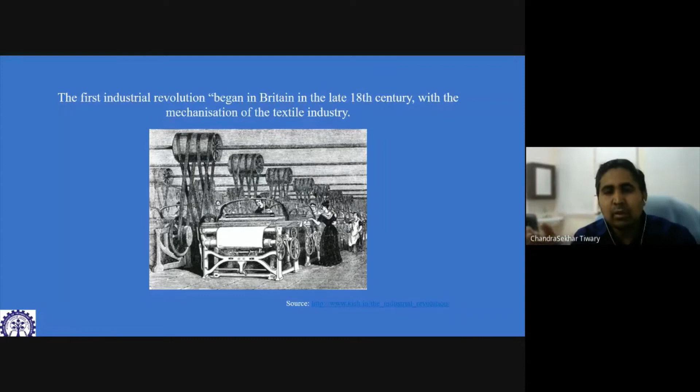The title of the talk is, as already told, 3D printing opportunity and challenges. You know, if you look at the industrial revolution, what I feel is in human history there are certain milestones which have changed the history of society or mankind. And one of them, certainly the closest one, is the industrial revolution, right? And whatever we see today has a lot to do with this first industrial revolution, which started in Britain.

If you go back to your history books and read about it, there were several countries leading in their own areas, and they were on top of production or productivity or yield or whatever economic measure you say. But what happened in this first industrial revolution, which started in Britain, is they started bringing machines into production.

And as a result, if you see the textile industry, which was one of the major industries at that time, where India or any other countries were making cloth or textile goods with a lot of manpower, a lot of cost, and also it doesn't have a lot of freedom to do things. Whereas the industrial revolution can start making things much faster because of machines.

At the same time, the reproducibility, like doing the same thing or the same size of those things, or standardization, was much better. Man plus machine plus resources were well optimized. And after that, if you see, the countries who really took over this industrial revolution are leading till today.

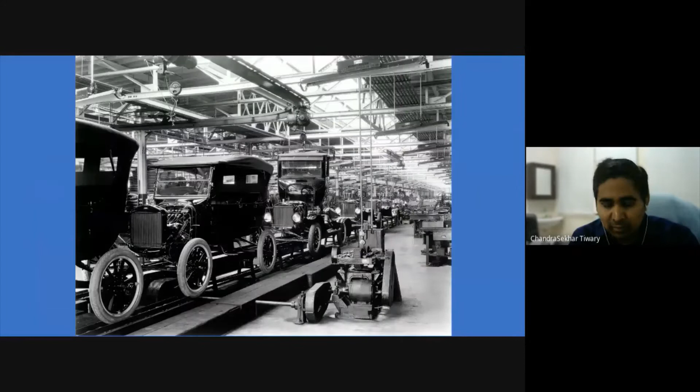And that's what I mean by customization: the old cars used to be like that, and if you see today's cars, it's kind of everywhere. And that's the second revolution in industry, we can say. After that, every good today has several categories, or categorization, that you want X size, Y size, X color, Y color, and so on. Giving options became quite common in any good or product.

Now, the third revolution, which is in process, is manufacturing. And again, we are coming back to the first industrial revolution, where machines were introduced. Now what we are talking about is, can we start making things without even humans? Can we do things automatically? Now, in manufacturing in general, most of you know there are two methods. One is additive and the other is subtractive.

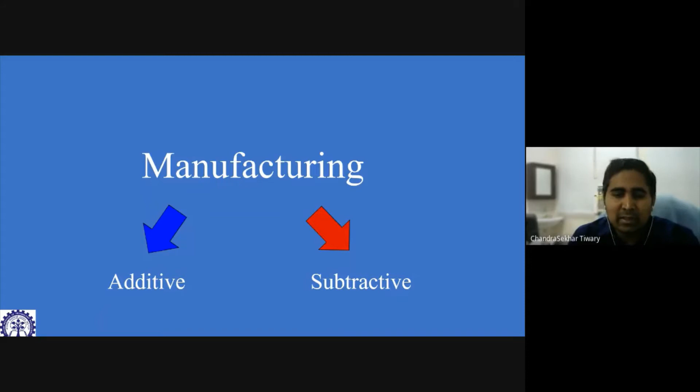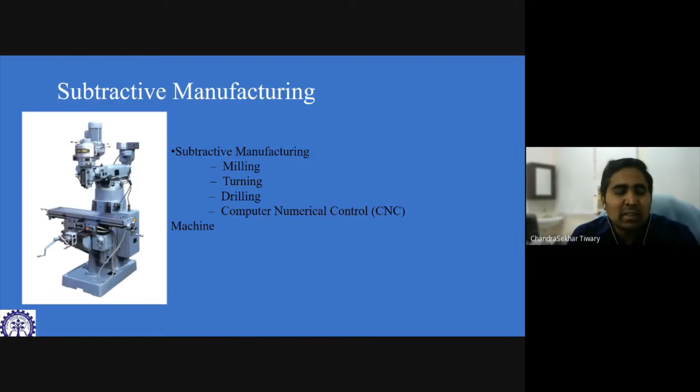Subtractive is very conventional, and every college or industry will have some bits of subtractive manufacturing, where drilling, milling, turning are there. You cut the block into the required size, shape or dimension, throw the rest of the material, and give the shape you need. But the problem is, when you cut, you lose a lot of material first. Second, it's really time consuming. But because there was no other opportunity till now, people continued doing it.

But now additive manufacturing came, and the word additive means you add things rather than removing things, and it brings a lot of exciting things, a lot of opportunities and a lot of challenges. We'll talk first about opportunities, and then come back to challenges and limitations in this whole area. With additive manufacturing, you can make 3D objects by manufacturing layer by layer.

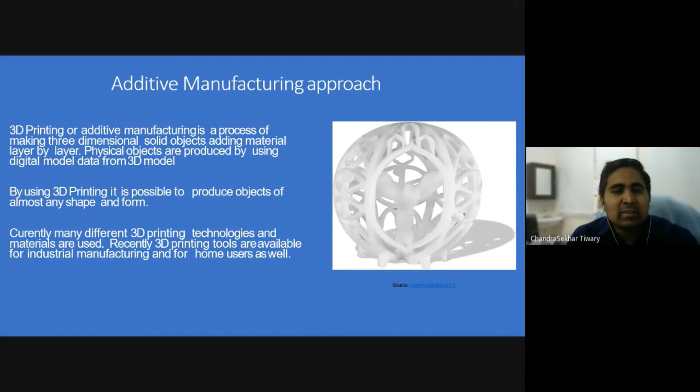Depending on what kind of tool you choose, you can make things at different speeds, different resolutions and different materials. On the right, you can see some very complex shapes. With conventional methods it can take very long, or you cannot do it for every material. But with 3D printing, we can do all these things in much less time and very efficiently.

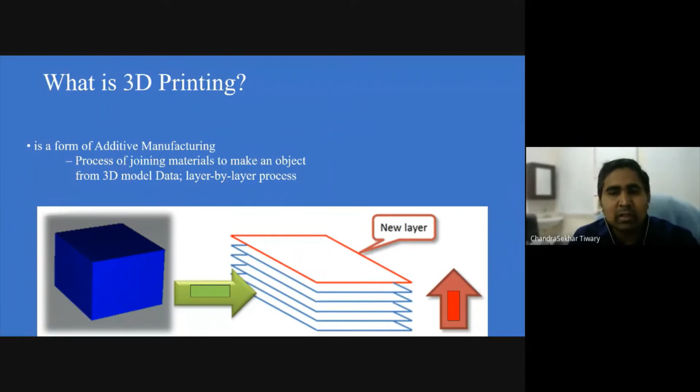Now, I think this slide is not needed, because everyone has talked about layer by layer, so we are not going to talk about it. Now, if you look at manufacturing decisions, the three important things which decide the whole manufacturing are speed, price, and quality.

Now, if you really want to have a perfect combination, you need to move in between somewhere, where you have a lower price, higher speed, and acceptable quality. Now, if you look at 3D printing, the good thing is it gives you freedom to tune all of it up to a huge extent. And definitely speed is one way where you can do much faster.

Quality wise, yes, you can tune the quality, or you can reproduce it and make the same thing again and again. And price is something which needs to be optimized depending on what process you are choosing, or what material you choose, or what you require, and so on. But definitely 3D printing gives you flexibility to check or choose any one of these.

Let's quickly go to advantage and application of 3D printing, so I'm sure the previous speaker has talked about it. But what I have tried to do is categorize different areas, so that we know what are the avenues, or what are the future directions of 3D printing people are looking at.

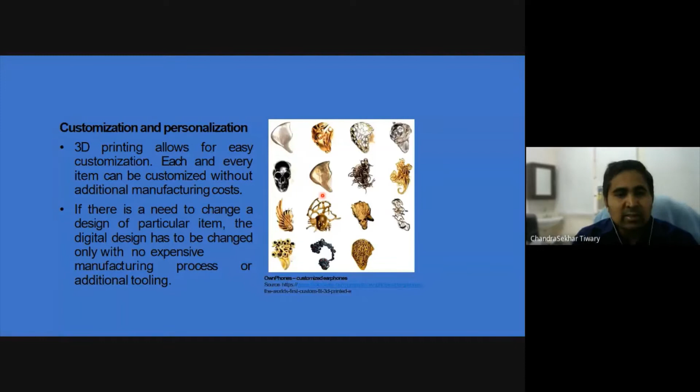Apart from that, that brings us to the next step, where we can personalize or customize manufacturing. When I say manufacturing, suppose you want to make jewelry. Everyone wants their unique jewelry, or you want to make something for education purposes, or even for medical purposes, and so on. So what I mean is, if someone wants X in 3D printing, that can be customized with much less expense, more flexibility, and with reasonable speed.

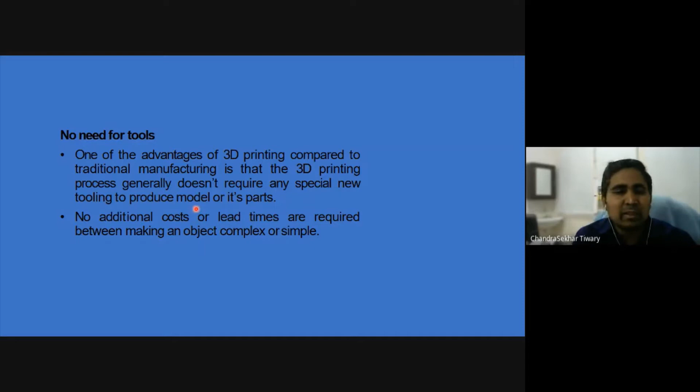Now, as we discussed, when you go to the subtractive method of manufacturing, one of the biggest challenges is the tool, right? So suppose someone wants to craft things on metal, the tool gets eroded or breaks very easily. Whereas when you're using 3D printing, there is no concept of tool as such. So then the whole planning and designing, which was in production, goes into designing a tool, is no more required. What you need is just choose the method of printing, and you can make anything and everything with all flexibility and ease.

Now, people keep talking about 3D printing in terms of market. So for example, you come up with a product and want to put it in the market. One of the bigger time sinks goes into scaling up. When I say scaling up, suppose you make a prototype which is, say, inch by inch, and you really want to make the real product which is 1 foot by 1 foot, maybe 12 times, and you want to scale it up. Now, in the normal method, it's not very simple because it involves several optimizations. It can have a lot of defects and a lot of challenges involved, and all this takes a hell lot of time.

And that's where the longest time into the development of any technology or product really goes in. They have to spend time on that. Whereas in 3D printing, the nice thing is, if you choose the printer and the scale of printer, suppose you take a real laser-based printer, you print something of an inch, or you make it a foot, the scaling effect is not much because you are using the same technology. It doesn't involve too many tools or too many parameters which need to be optimized. So that reduces the development time drastically.

That's one reason why, if you look at the number of startups or companies growing faster in this business, quite a lot of them are in 3D printing. The moment you produce a new class of 3D printer, everyone starts using it. So the flexibility to consumers, combined with the flexibility to scale up, really makes it one of the key developments in the last 10 years.

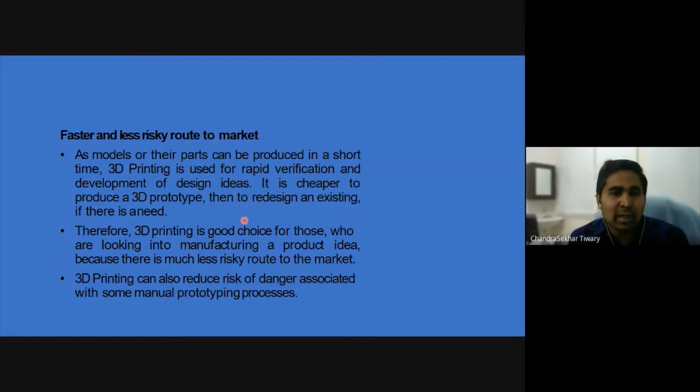As we discussed, 3D printing has less waste, is sustainable, and environmentally friendly. In conventional manufacturing, the subtractive method, you create dust. If you go to places where people work with clay or ceramics, cutting generates huge amounts of dust. Whereas in 3D printing, you just print without generating waste or dust, which makes it much cleaner and environmentally friendly, as well as sustainable.

We don't generally think about sustainability, but consider a material like gold or metal, which is a limited resource. Suppose you have 1 kilogram of gold and want to make things. If you use a method where you cut and rework, there's loss involved, so you start losing material. Now, with a 3D printing method where you don't lose even a gram, that makes it more sustainable. Because losses are low, it helps retain and utilize material in a better way.

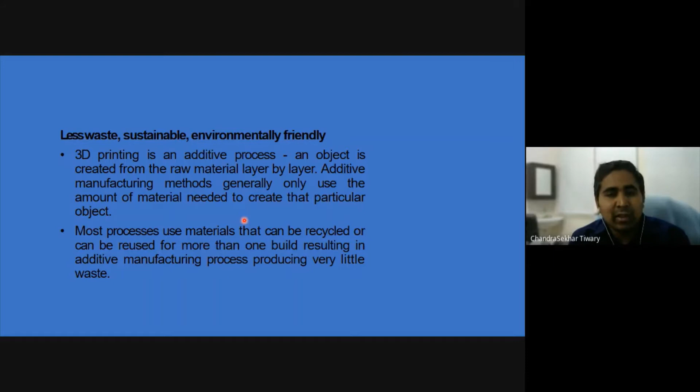Now, limitations - yes, there are a few. One is higher cost initially. Depending on what method or scale you're talking about, and depending on resources, it can get costlier. But if you do it for a long time, that can be optimized. People need to think about this, and they are working on it currently, because this area has only really started in the last decade.

We don't have too many material choices yet. Someone can ask, can we print diamond? Or can we print carbon-based material? Those options just aren't there yet. Not every material can be printed, and you cannot get every color, because people are still working on it. We don't have all those options at this moment.

There's also strength and endurance. In one of the initial talks I heard, people try to see how we can match the strength of conventionally made materials. With optimization, we can achieve it, but that still needs to be done for any 3D printing method or material.

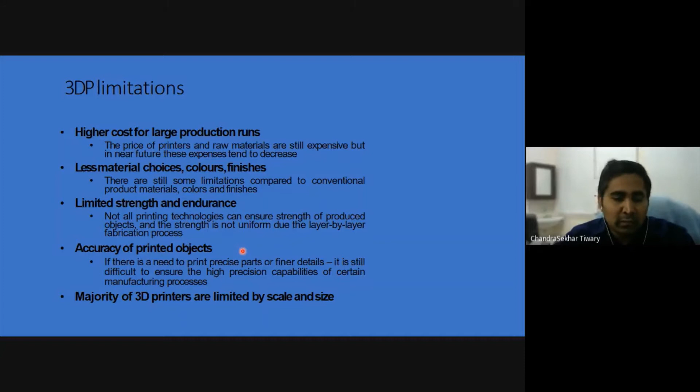Accuracy of the printed object depends on which printing method you choose. Surface finish and dimensional tolerance are still issues - if you need precise dimensions, the shrinking or expansion during the process is something people still need to work on, as is surface finish.

Looking at the market, not too many industries are putting 3D printing into practice yet, though many see it as a future perspective. They're looking at how to start doing things, but it's not yet in the market at a scale where large quantities of goods are produced using 3D printers. Small things have been done, but it's not universal yet. We don't have too many large-scale printers - most printers are of limited size. That's something people are working on.

I'll give just a quick brief history. Other speakers before me have talked about the history of printing, but I want to spend 2 or 3 slides on it to give you perspective on why this whole 3D printing boom came about. People might say, if you understand the basic science, 3D printing was around for a very long time - it didn't just come out of nowhere. What changed over time is what we're going to discuss, to explain why this 3D printing boom happened.

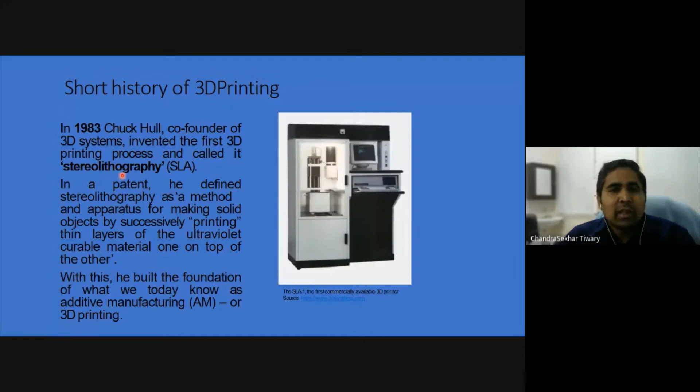If you look at the history, in 1983 a group of physicists or scientists were developing stereolithography, which is essentially a method of making a material.

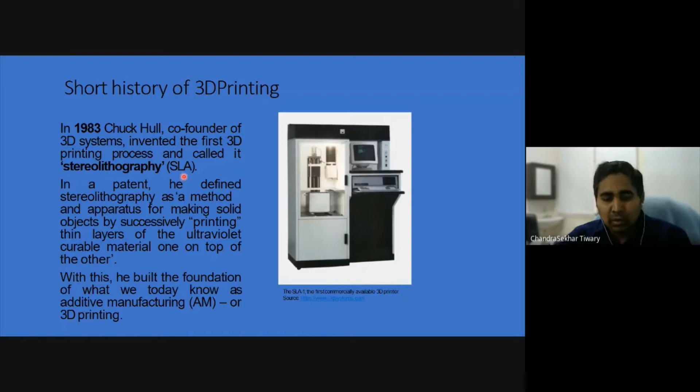You make the first layer and then let it cure, then put the second layer, let it cure, and keep on doing it. They call it stereolithography, and they put the short name SLA. The patent was granted and so on.

But nothing happened, or no major development happened in almost 20 years, or I'll say 2 decades. Nothing was happening. People were doing it in research. But the real boom started in 2000, or 2003 onwards, where this started becoming one of the buzzwords.

Now you can see an interesting observation, right? A lot of science which has been developed before never came into real notice, just because resources were not there. When I say resources, the first thing I refer to is computers. Computer, electronics, or computer-human interface was not well developed till 2004. So although in 1986 they developed everything and the science was known, it took almost 2 decades for people to really develop the computer thing.

And once we started getting computers, or the interface of computer and machine, they reached a level where they can really make it easy. And just because of our computer capacity today, or the software to control motors, or the real machines, we are able to make these printers at home or anywhere you want. You can even do it with your laptop or mobile phone nowadays. So one of the printers we have, you can print using mobile phones. So the point is, with computer development, people started realizing the power of 3D printing, and then this whole history follows, which people talk about all over.

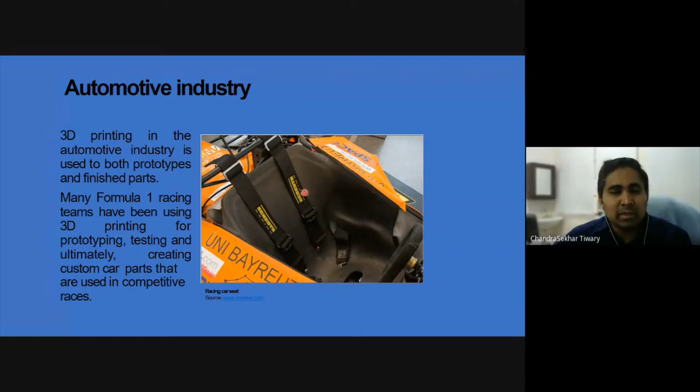Now, as I told you, application area: automotive industry. Yes, India is one of the good leads in car making or car consuming. Also, we have a huge market. But remember, still in cars you need a lot of customization. Suppose you want to make things specific, or you want to make a high-speed car for very specific dimensions and so on. So automotive industry is one of the driving forces in the 3D printing area, and people are working really with very high speed in this direction.

Just for example, if you go on the news you find people have developed, or they claim they have developed, and it's all over in the news, 3D printed tires. Now the question is, why are 3D printed tires needed?

The first thing is, suppose if you have a road, and it's very common in India that we get a tire puncture. Now, if you are moving at very high speed, what's going to happen is you end up having a huge number of accidents. And yes, we do have a lot of accidents because of such cases. And in the West, it's a bigger concern, because if your car is moving at very high speed, a small puncture can lead to a big disaster.

So there is a lot of work going on in this direction, where people are trying to build it up so that we don't face those things. At the same time, if you have 3D printed tires, you can also take care of the roughness of the surface. When I say roughness, I mean small ups and downs can be taken care of, because these structures are built in a way that can handle small shocks.

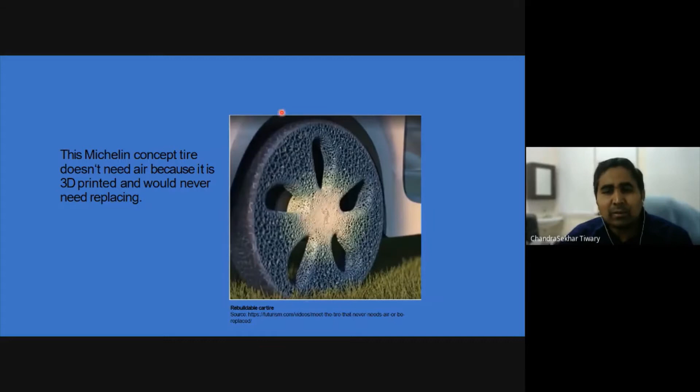So that helps in taking care of the body of the car and so on. But that is one of the directions people are working in. There are a lot of things that need to be done before you really see it. But yes, there are initial successes as well.

The medical industry is one of the really driving forces in this area. And I think tomorrow you have a talk by Professor Vikramjit. I'm sure he's going to talk about this kind of advancement. But yes, in the medical industry, one thing is we have to clearly understand every human is different. Although we have medicine which is generic, if you want to have implants, or an operation, or an organ, each of us has our own characteristics in our body, right?

So if you look at your bone, or any dimensions, they are very specific. Now, if you really want to repair things, a universal part, although people try to use it, is not very sustainable or not very comfortable. If you really want to get rid of this problem, the only solution can be 3D printing, where you can scan the body parts. Let me give an example.

If you undergo an accident and your bone breaks, what they do is put in metal parts, right? Remember, these metal parts are not custom made, they are very generic. So after some time they need to remove it, because it's going to create a problem for you. With current technology, people are trying to make implants which are very sustainable to your body and match your dimensions, so they fit perfectly, which will help you in terms of healing and the sustainability of your body as well.

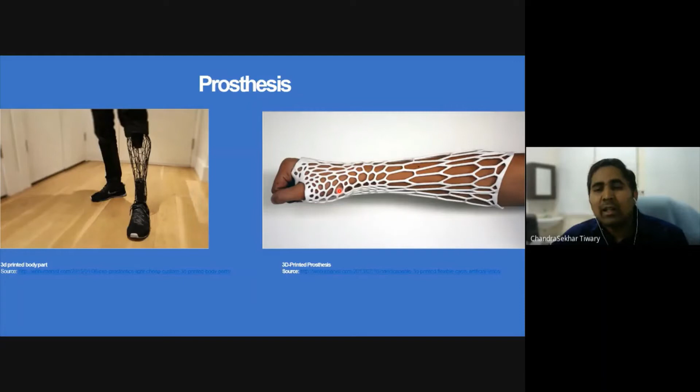Prosthetics is another area where, again, each of our body dimensions or features are different. So with 3D printing, we can build things like a leg, where you can choose the part that got infected and make it. If you have a small ankle or a small twist, you can take your shape and print things of your dimension. At the same time, you can create porosity, meaning lighter weight, easy to wear, and so on. In one of the research areas, we'll talk about that as well.

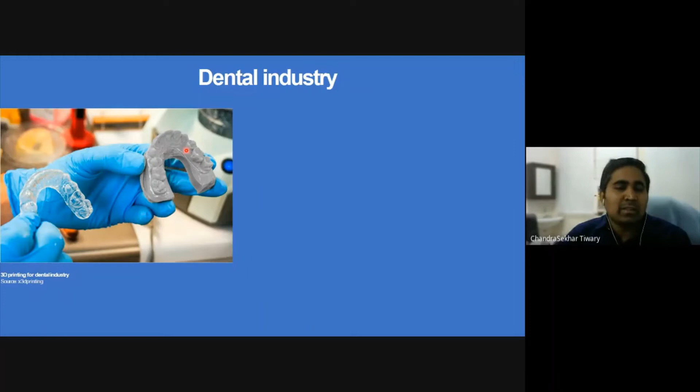Dental is again part of medical. People have been doing this, but if you go to a dentist, they take the shape and it takes longer. With 3D printing, you can do it faster, and that can help this industry.

Aircraft aviation is one of the industries where reducing weight or increasing specific mechanical strength or specific modulus is a key issue. With 3D printing, people are sure we can improve fuel efficiency in a drastic way. But remember, this is an industry where the risk factor is very high, and that's one of the things that concerns them. But still, people are trying to go in this direction.

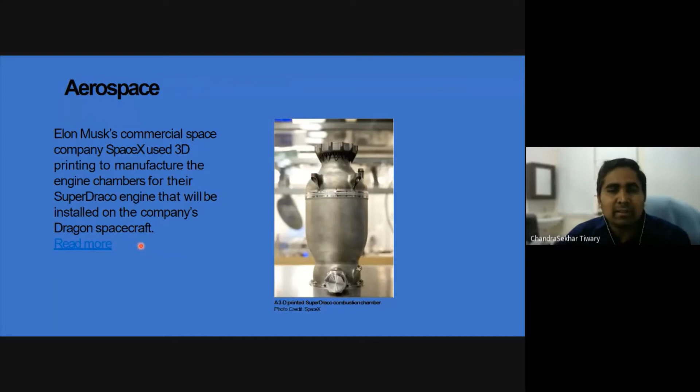There's a lot of work happening because all these aircraft have very complex shapes. I'm sure you were taught that making complex shapes like this in aircraft takes a very long time. With 3D printing, people expect to reduce that, and you can also tune it very easily. But again, this is an area where people are doing a lot of research.

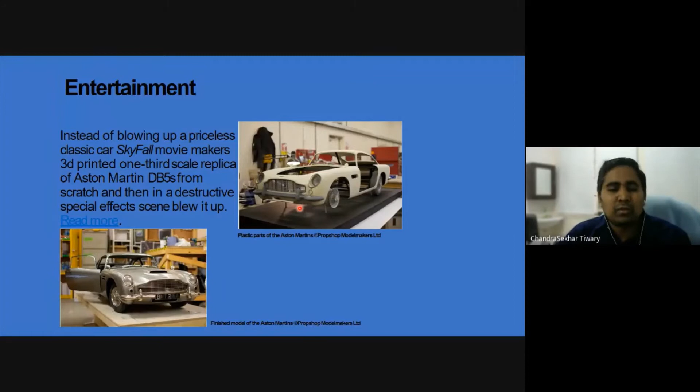Entertainment, yes, especially with movies getting expensive, people want to see more realistic-looking things. People want their own way of imagination, and entertainment is the place where you create things which may not exist. 3D printing is used drastically all over the world for this business.

Art and design: you want to see beautiful things with complex shapes. 3D printing gives you whatever you want, and that's one of the areas where it has taken a huge lead already. You may or may not know there are several things which come to you already 3D printed. So this is one area which has gone way ahead, and they are doing very well in this direction.

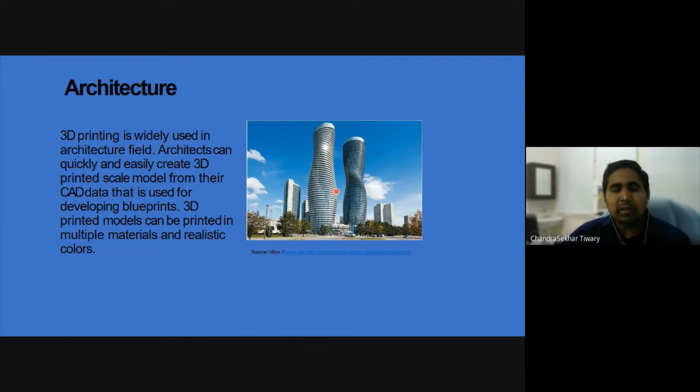First, it's easy to make. At the same time, you can decide how much complexity you want, or you can customize. But this is the area where I think it's showing, depending on infrastructure or utility or requirement. But again, this is somewhere people are moving very fast.

Jewelry, yes, as I told you in one of the initial slides, if you want customized or specific jewelry, with 3D printing they are able to do it. There are several companies or several groups who are trying to do this kind of customization of jewelry.

Education is another area where 3D printing is contributing in a huge way. If you remember your school days, if you have taken biology in your 10+2 or even in your bachelor's, you end up cutting a frog or cutting a species. And some of us may not like it. If you can tolerate that brutality, yeah, maybe you can say brutality, you're okay. Otherwise, some of us can faint and so on.

But the nice thing about 3D printing, you can print any object, whatever the complexity. You don't have to kill anyone. You don't have to cut a frog and then stitch and throw and so on. You can easily learn all those things, especially for human anatomy. In medical science, this is very useful, where they 3D print the parts, and then you can teach batch by batch, and you can use it for several years, and still you can learn things.

So 3D printing, not just in medical, also in any other science area, it's coming up very easily. It's already there in the market. You will find a number of examples of this.

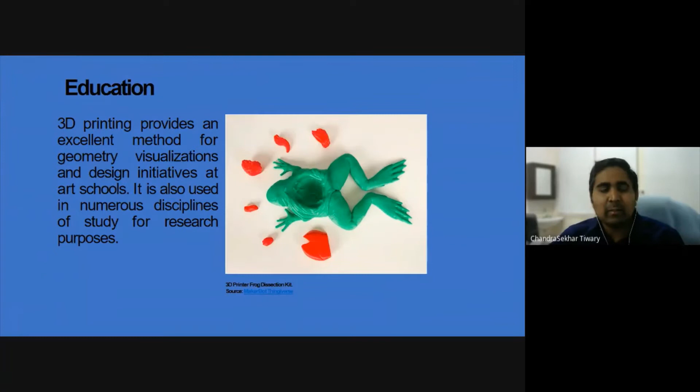You can see my laser pointer, right? Hello? Yes, sir. Okay, perfect.

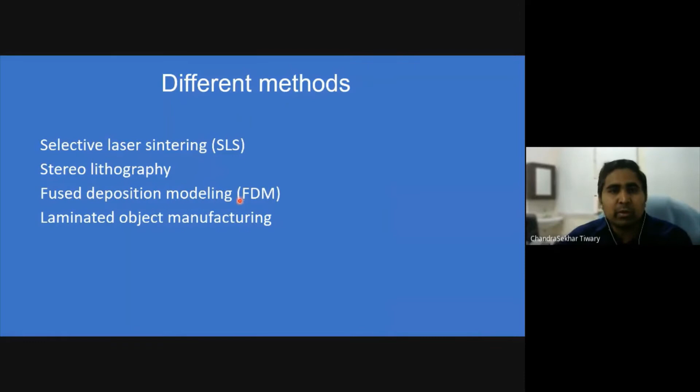Now, different methods of 3D printing were already discussed, and I think people have talked about all the methods. Depending on who has categorized it, it changes. Depending on material or society, there are several of these 3D printing tools and technologies. Every method comes with some advantages and some disadvantages, and you have to balance that while doing any 3D printing. But in terms of research, we'll try to see where a researcher can get in and what things we can do.

For example, if you have an FDM-based printer, which is very simple, it doesn't use any toxic material. It can be kept anywhere. It doesn't need any post-processing because it has a lot of nice surfaces and so on. It's cheap, it's light, hence it can be easily carried or moved. But it has limitations, like the accuracy completely depends on the filament. And you cannot make the filament of any material, so that's another limitation.

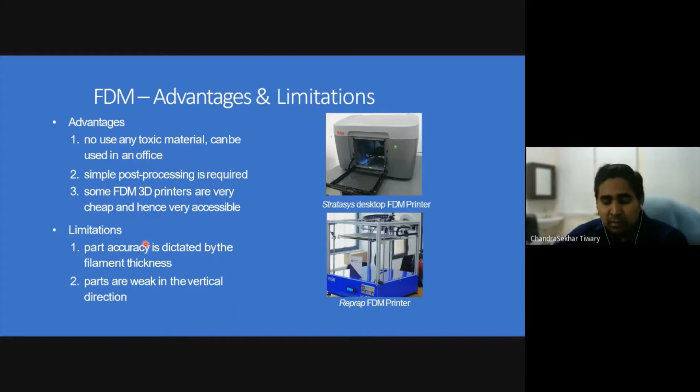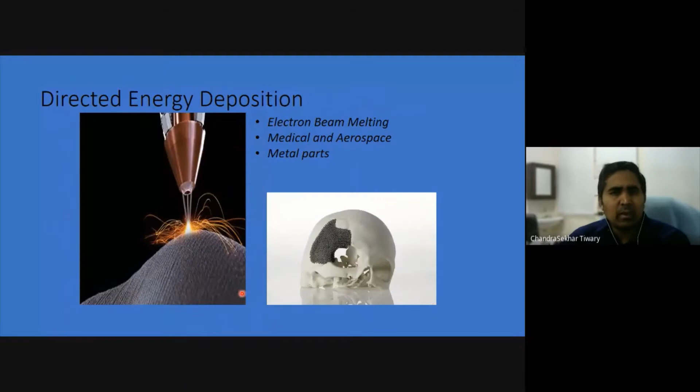And in general, remember, these are made with a low temperature polymer, hence they are not very sustainable at high temperature. Also, with the strength, you cannot make really big structural material and so on. So we can go on; each of these tools has advantages and disadvantages. Depending on which tool you choose, you have to live with it. I think all these were discussed already, and we will not spend time on it.

In one of the last sessions someone asked a question about it, and I thought it's good to put this slide. In metal, and especially in manufacturing, the laser-based printer is all over; every manufacturing company is buying it and trying to see how they can replace components. But there are a few challenges which are crucial in metal-based printers. First is porosity. Whatever printing method you use, people are still trying to see how we can achieve 100% densification.

Now, remember, if you make the component for space or for atomic energy or things like that, you are supposed to make a solid object. Now, if you have a very small porosity, and material scientists or mechanical engineers will agree with me, even a 0.1% porosity is good enough to have a catastrophic failure. When I say catastrophic, it means suppose you have a void, which is going to act as a site for a crack; it's going to expand all over.

And as a result, you cannot really put things in space, or even in nuclear energy, or for that matter, for very specific medical cases as well. So you don't want those things. So achieving that is still a challenge, and people are working at it.

And isotropy is another thing which is very crucial in most of these 3D printing parts, because if you change the direction of the object, you see a difference in mechanical property. Yes, and if you look at horizontal versus vertical, the porosity changes, which is not very easy to control. People are trying to see how we can do it, and at the same time you see a huge difference in directionality in terms of grain size and so on. So that is still an area where people are working, and a lot of metal-based 3D printing is still concentrated in that area.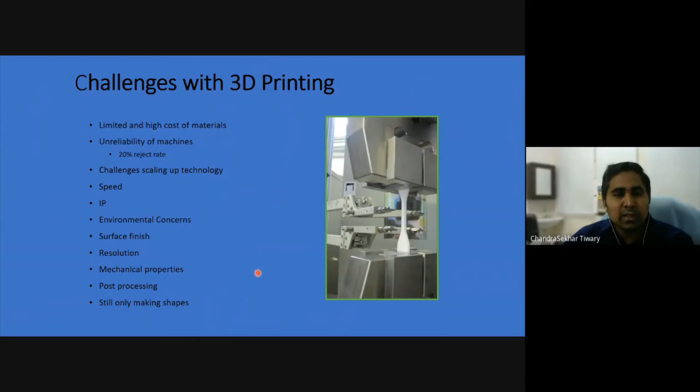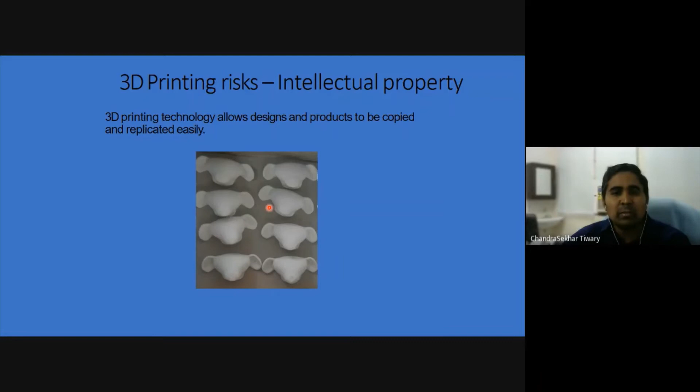Yes, it has. We discussed some of those challenges, so I think we don't need to discuss them anymore. One of the risks which comes with 3D printing is intellectual property. What it means is, if you remember, you want to make parts of any object, and the patent used to be held by X company because they have the technology to make it. But with 3D printing, anyone and everyone can make things. So a lot of companies who hold intellectual property are worried about how to keep track of it or keep hold on it, because any parts can be made by 3D printing.

Yes, cyber risk is there, and a lot of discussions are in this direction. But again, that's something which comes up for every technology. Liability is another thing. Suppose you 3D print parts and then it fails somewhere. Trying to understand where or how it failed is something you cannot put on someone. It can have a number of reasons. So if some damage or failure or bug happened while processing, you cannot go to the computer and blame it. You have to live with it and see how you can change it. But again, this puts a lot of legal things into a problem.

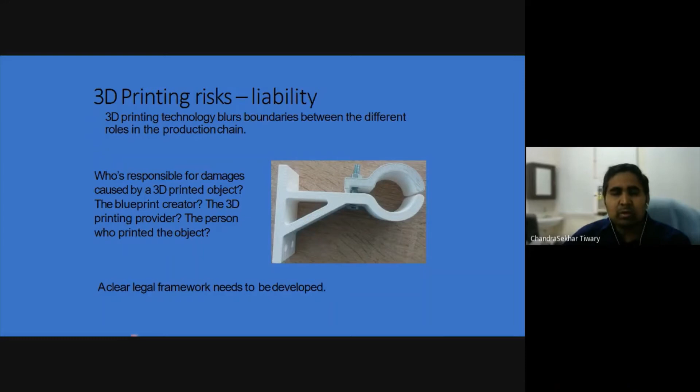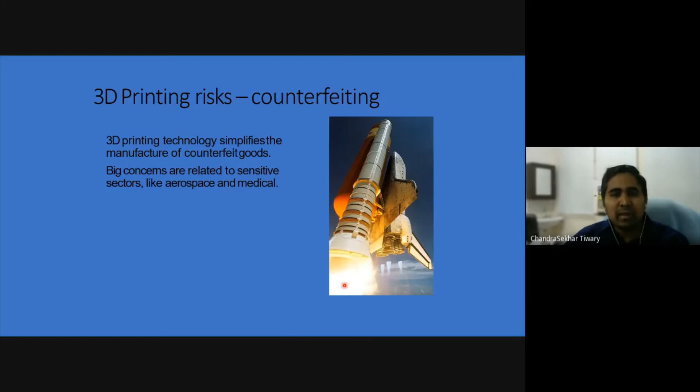Yes, space is something which is again, a lot of complexity comes into the picture with 3D printing. People are really worried about how to preserve it or how to manage it. But yes, that's another challenge. Just one or two slides about this particular thing, which I think is a myth, and whoever is not part of 3D printing will have these kinds of notions. And I thought it's the right platform to put this.

For example, people think that 3D printers cost too much. If you go to a place and say, oh, I work in the 3D printing area, the first question is, oh, you must have a 1 or 2 crore project and bought a lot of big equipment. Just to make it clear, a 3D printer doesn't mean 1 or 2 crore equipment. You can buy a 3D printer as cheap as $100. And in India, if you go online, you can buy a polymer-based printer for, say, 20,000 or 25,000. A reasonably good quality printer you can use for research or for your work. So not every 3D printer is expensive.

Now, another thing is, oh, 3D printing is only done for plastic. But with 3D printing development in just the last 5 years, you can just go on the web and see that anything and everything can be printed in today's world. And not just that, people have printed things like wood. People are printing things like food and concrete and so on. So it's not just limited to plastic.

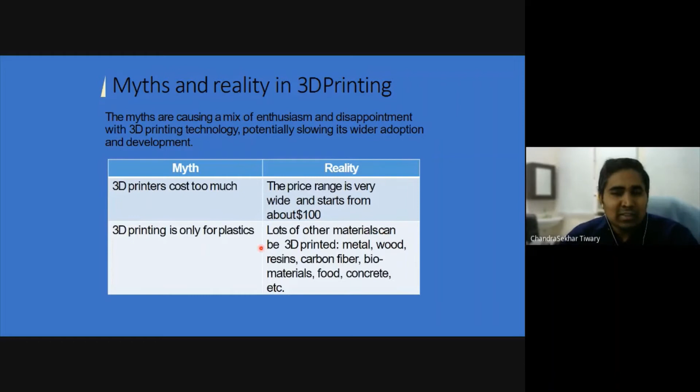You can print anything and everything, just depending on the method or the printer you have. Now, you'll find all over the news someone comes and says, oh, we have printed organs, and X university or Y university has printed a heart or lungs and so on. But the reality is, yes, all these are done, but all of them are at lab scale. Again, there are a few places where you'll find this claim that they are using them and so on, but still, I think at the commercial level or in reality, we are not there in terms of printing organs.

Now, again, people think that 3D printing is quick, right? People think a 3D printer is like a paper printer where you put things in and immediately it comes out. But in reality, yes, 3D printers are fast, but it's not like your 2D printer where you can just do it in a minute. It takes time because it works layer by layer.

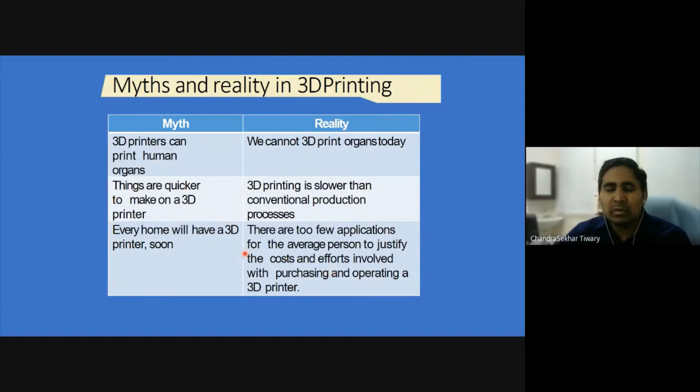Now, another thing which is all over the news and social platforms is that soon every house will have a 3D printer and so on. But the reality is, in several schools I have seen people buy 3D printers. But if you have a 3D printer and you don't know what to do with it, it doesn't serve the purpose. So anyone who buys a 3D printer must know what requirements they have, what things they want to do, what you can and cannot do, and where to utilize it. All these things should be clear. Otherwise, it's just going to waste your money and resources.

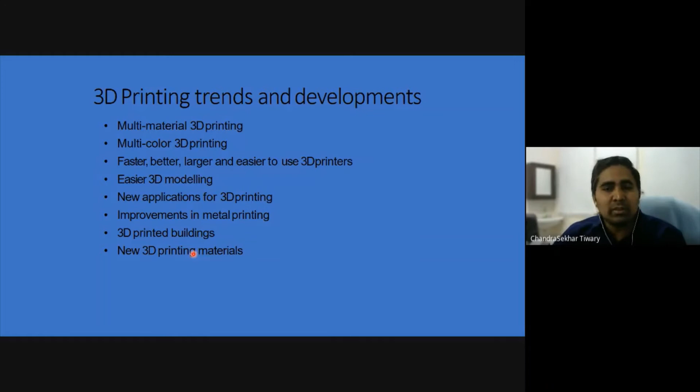One of the developments in terms of material is we can print multi-material, we can print multicolor, we can do it faster and easier. Any structure which you put into a model, you can print it. You can do innovation in printing. You can do improvement in structure, topology and all these things. You can 3D print big structures like buildings and so on. And if you develop a new material, yes, you can 3D print it. So these are the directions we work on in our lab, and I'm going to talk about all these things in subsequent slides.

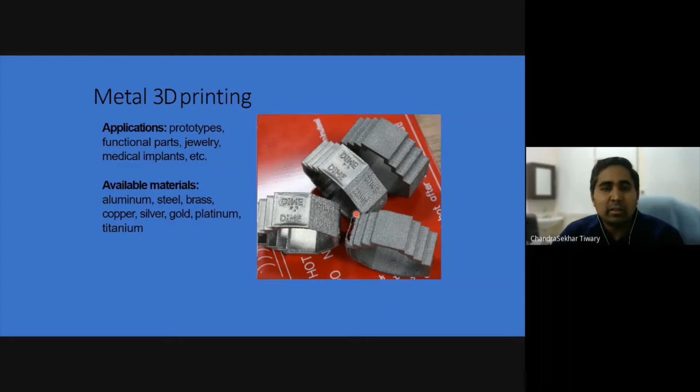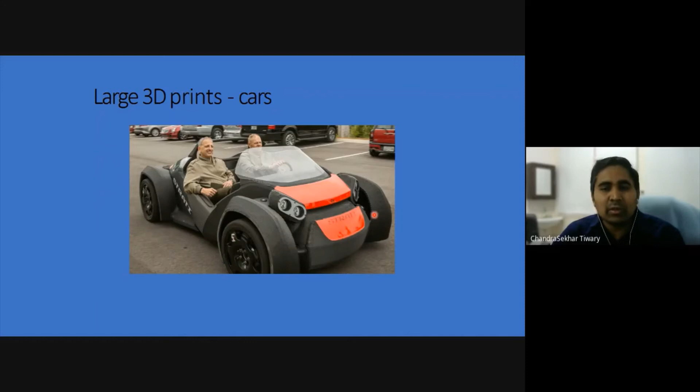And yes, there are a lot of examples where you see cars and these kinds of parts printed, and you'll see at any ASME or engineering meets, these are shown, that you can print the whole car with just one printer.

Now, in just 2 minutes, we'll quickly brief what steps you need to go through in any 3D printing. First, you need to create a computer-based model of what you need to print, and there are a bunch of software tools which can help us do it. I think in my previous lab visit or lab discussion, I saw they described it. So you need to create a computer model.

Then you need to create the STL file, where the coordinates and so on are mentioned layer by layer, or the coordinates which your machine can read. And then you put them and check, is it consistent? You have a hole or a defect or small porosity holes and so on.

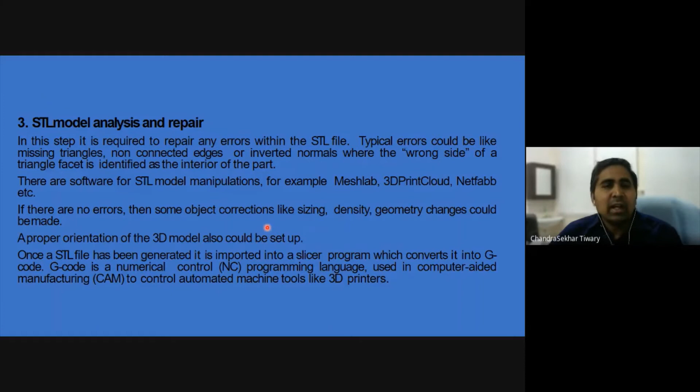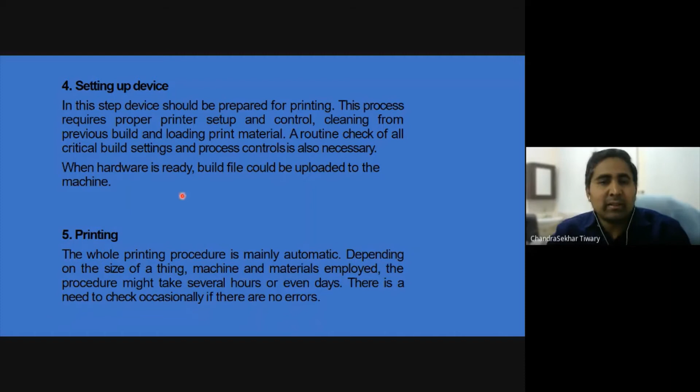Those things need to be checked, so you don't have any bug in the printing. Then you put this solid or proposed model into the computer and connect it with the 3D printer, make sure the control of the printer is connected well with the machine, and then it starts printing. These are the only major 5 steps. Then removal, once it's printed, there are different methods of taking it out, and in some cases you need post-processing, in some cases you don't.

So these are the 7 basic steps any printer will have. The first 2 steps are generally common for any printer. The only change is in setting up the device and control, and printing, but other steps are the same in most printers. So this is what I discussed quickly about the 3D printing area.

Now what I'm going to talk about is what I do in the lab. When you join as a new faculty anywhere, or even want to start a new area, generally what we do is choose a simple area where without complexity we can contribute. When I started, that's what I did.

My background being in materials or metallurgy, I know how to strengthen material. If you see figure A, which is compressive strength versus density, Ashby is the one who mapped different classes of materials into regions. For example, foams, which include woods and honeycomb and so on, fall into a subset of this. But what you see here is all these materials have lower density, and they have lower strength as well.

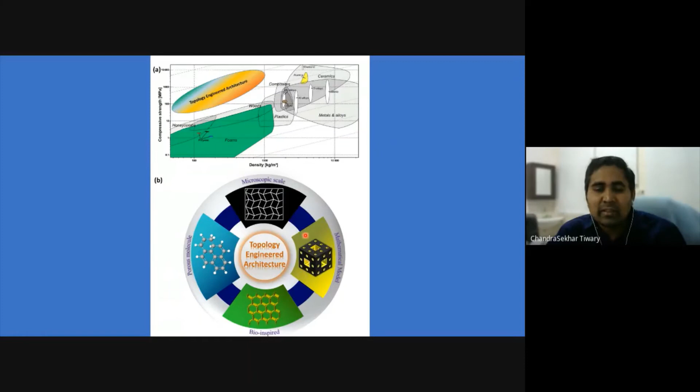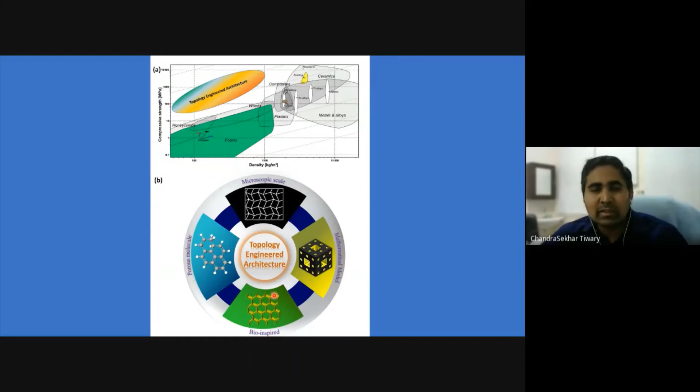We have shown in some examples that we can choose some of those and 3D print, and it can give a lot of exciting results. Because of time, I cannot discuss all of them in detail, so I'm going to give you a flavor of all these. If you have questions, or if you're interested more, we can discuss in detail, or you can drop me an email later. Now, the first example is sea shell.

If you go around any sea beach area, what you see is a lot of these shell structures. Remember, there are a number of sea shell shapes, and there are different museums in the world where they keep all the sea shell structures. Now, one of the things is, if you see the sea shells, none of them are simple shapes. What you see around you has much complexity.

Now, in nature, you don't find things simple, like you don't find things of cube or rectangle or cylindrical shape. They are really complex, and you can see these pictures from Grand Canyon. You see this kind of topology all over. You can see shapes all around which are not simple at all.

Now, nature makes this topology or this complexity for some reason. In 2014-15, the question I was asking is, why does nature choose this kind of topology? Can we understand it? And we first looked at this sea shell structure.

There was already work at the microscopic level. When I say microscopic, I mean they took the sea shell, which has a nacre-like structure. There's a lot of work here where they break them, and what they see are nice plates of ceramic separated by an organic layer. Just because of this kind of architecture, you get a much higher combination of strength and toughness.

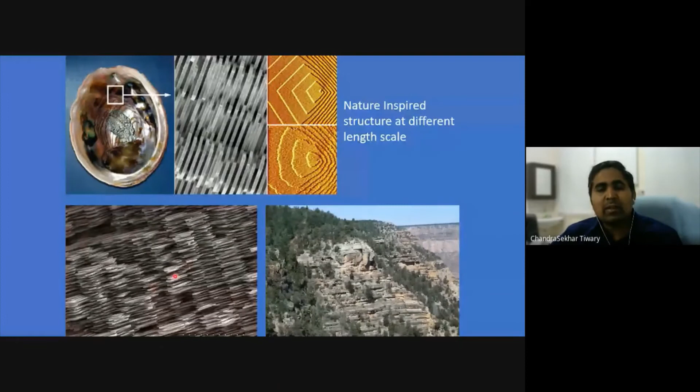So the idea is, if you have something at the nanoscopic or even microscopic level, the mechanism or the mechanics does have a role to play. What we started understanding, the first work we did in 2014-15, was we took the sea shell structure, made the AutoCAD design of it by measurement, and finally we built it with a 3D printer and printed it.

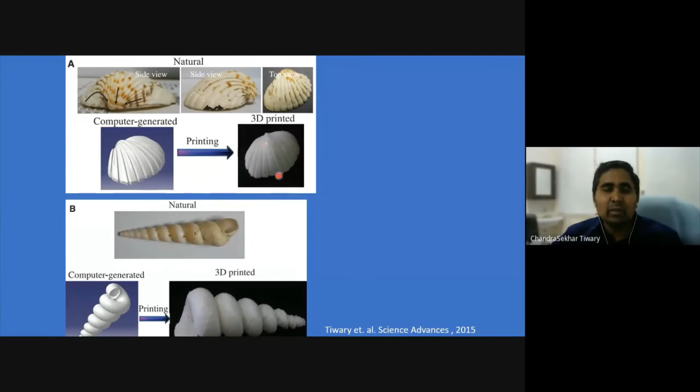We took two of the models and did that. Then, in collaboration with Mahapatra in aerospace, we did an FEM analysis, where we tried to understand the role of individual complexity.

For example, if I take the same sea shell structure with a spherical shape, what happens if you deform it? What we see is, if you have a spherical structure and you press here, the stress or strain both distribute uniformly. The first complexity in the sea shell structure, this kind of spine, results in complexity in the surface. Because of this complexity, you see stress localization at certain places, meaning it's not uniformly distributed. Hence, you can accommodate a lot of stress.

And if you add the second level of complexity, meaning these ups and downs, a positive and negative curvature, you can see it can take even higher stress levels.

At the same time, another thing that happens is you can see positive curvature and negative curvature are always opposite in stress condition. It means they can accommodate locally as well. Now, if you really want to build a structure out of it, and just to understand what really happens...

Remember, all this sea shell structure has a living species staying inside. Now the question is, is it really advantageous to stay in this kind of complex shape? To understand this, we take this spherical shape and put an aluminum block at the bottom of it. What we are seeing here is the aluminum block and the half-spherical particle.

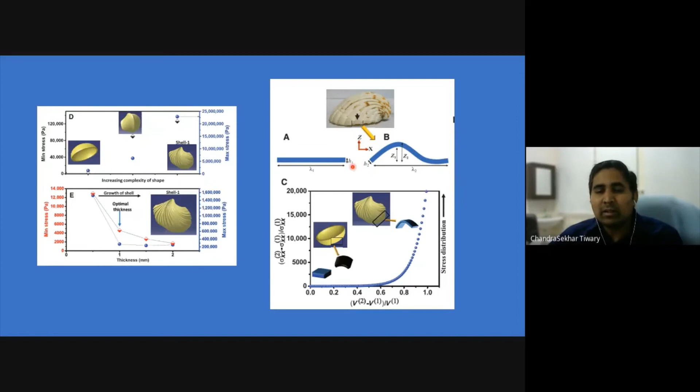Hello, sir. Your voice is not audible.

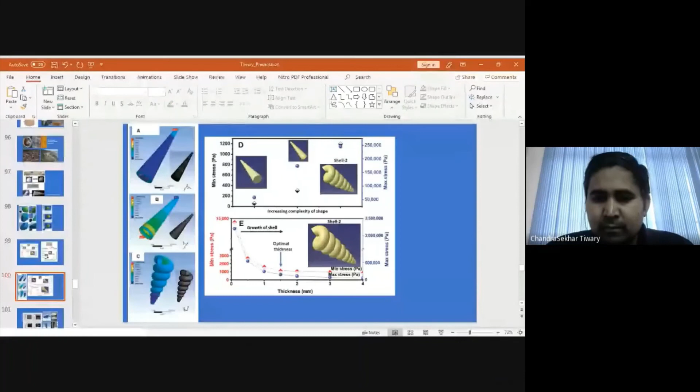Okay, so is the screen visible? Yes sir, it is visible. Perfect, okay.

So coming back to this, what we see is if you have this kind of topology in this kind of sea shell structure, the stress distribution is more non-uniform, and there are a lot of spaces where there is no stress. It means if the species stays there, they are not going to feel any stress.

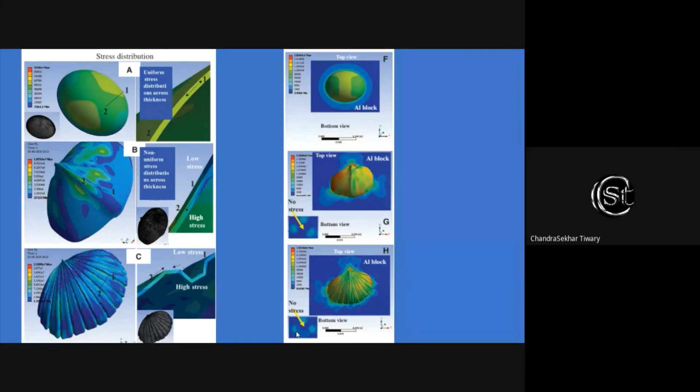As I was talking about, the whole thing is related to curvature, and because of this curvature, the stress difference between one point and another, or the maxima and minima, is really high as we keep on introducing more topology. And analytically also, we do the same thing.

Now, if you consider another kind of sea shell structure, which is very similar to conical, compared with conical shape, we do see that if you have more complex shapes, shown like C here...

If you see the C here, you can clearly see there is a zone which has very high stress, and a zone which doesn't feel any stress at all. What it means is, if the living species is going to stay in this zone, they are not going to feel any stress if you apply any load in any other zone.

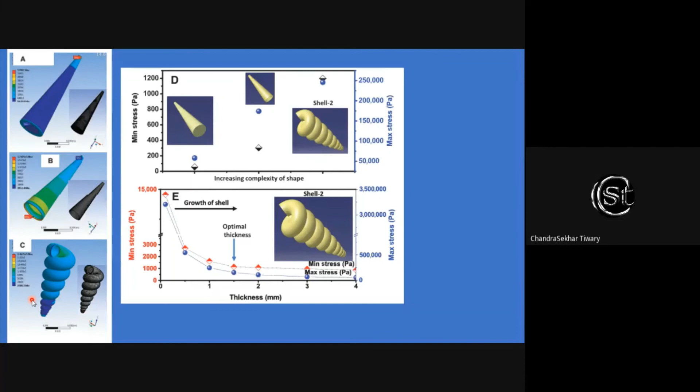Again, this has to do with the thickness, and also it changes with the radius. So depending on the ocean condition, the morphology of both of these kinds of sea shell structures can be different, just to accommodate the stress they feel under the ocean or outside environment. Also, if they undergo some impact and so on, the shape and dimension change just to fit the living species in that particular condition.

Now, what we have done is we started comparing—if you assume solid polymer versus solid ceramic versus topology-engineered complex shape.

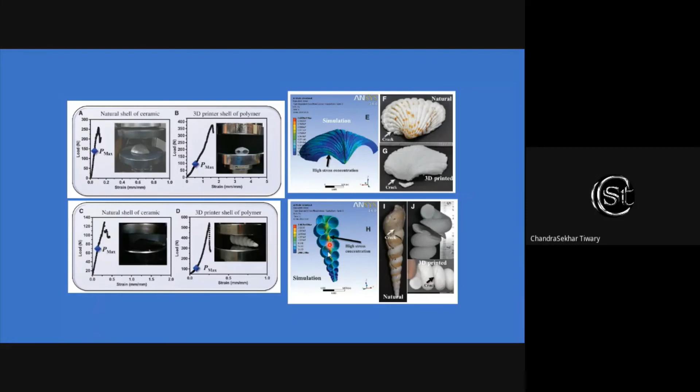And what we see is if you have a solid ceramic, which is calcium based here, or a solid polymer, this is the stress level you can achieve in that given surface area. But because of topology, we see a huge enhancement. At the same time, when they fracture also, we see what exactly happens in nature can be mimicked in the 3D printed structure, and we can now understand what role this whole structure or the stress concentration plays in this kind of deformation in these complex shapes.

Now we can extend the whole idea and look at different nature inspired structures. For example, we have chosen the ant structure. If you see this ant hole, generally ants are one of the most efficient species on planet Earth, because they can take loads multiple times higher than their own weight.

Now, if you consider their house, when they make a hole, it's very complex. What people generally do is they pour metal into it, and the metal flows into these holes, and finally they take out this whole block and they can get the 3D structure. You can see this structure is really complex. Now the question is, we want to understand what advantage we gain by making this kind of structure.

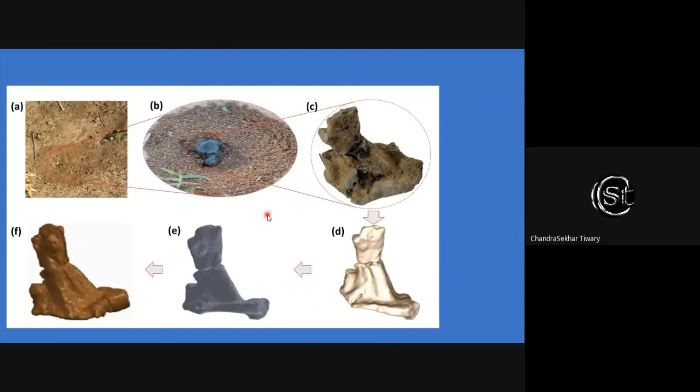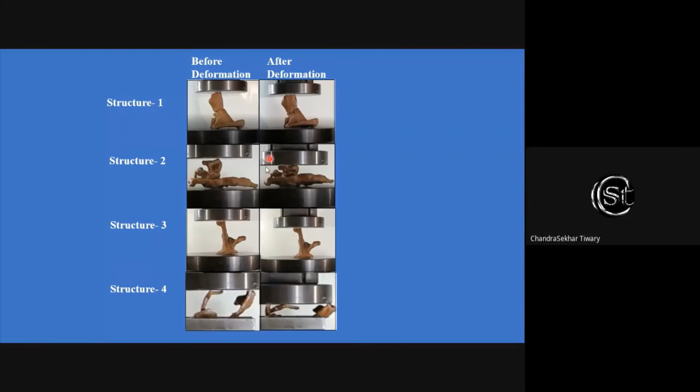So we have done some experiments on that. We took cement and filled this pore structure, then did a 3D scan and got the structure, and then we started building understanding about deformation and the complexity and the advantages because of this complexity. This is one of the directions where we are working. We are trying to correlate finite element methods and the real experimental deformation, and try to understand the whole thing.

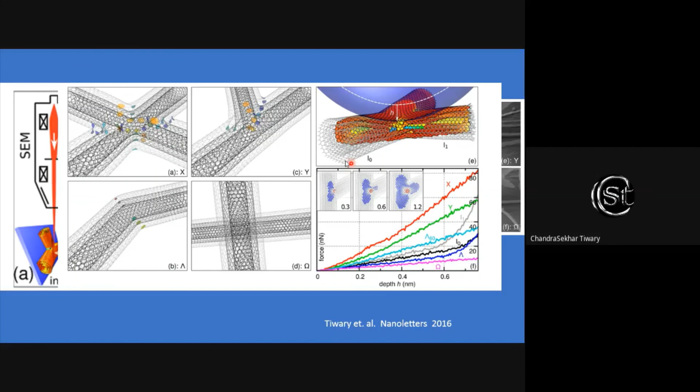And the reason for this kind of enhancement is given to the curvature of this junction, and we can clearly see if you have a positive and negative curvature next to each other, they can complement each other, and as a result we can get enhancement as compared to cylindrical pristine nanotubes.

Now, taking this whole idea, there is a very complex structure already in the literature, which is called schwarzites. It was developed by a mathematician named Schwarz in the 1880s, and he created this kind of complex topology. If you look at these topologies, I have not played the video, but you can clearly see these are different structures, and there is no point in the structure which is flat. So every point in this three-dimensional structure is curved. And they're so complex, there is no method you can make them.

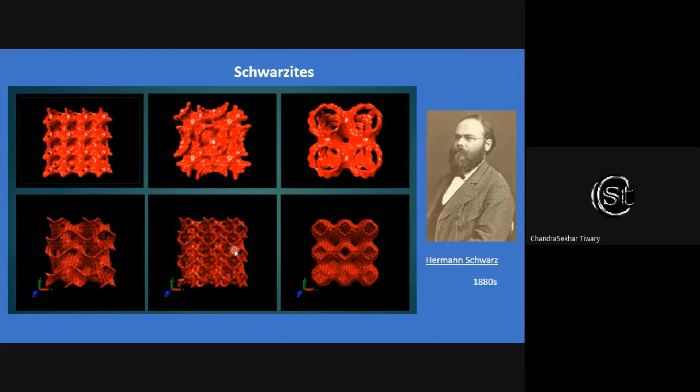But as these are generated in a computer, we can easily print them. And this is what is shown here. This is computer generated. We make the SolidWorks structure here and then print them. When we do mechanical testing, we can see we can enhance the mechanical properties of the polymer by multifold. And we can tune the shape, size and dimension, and we can get specific strength much higher as compared to the pristine polymer. So that's another direction we are trying to explore.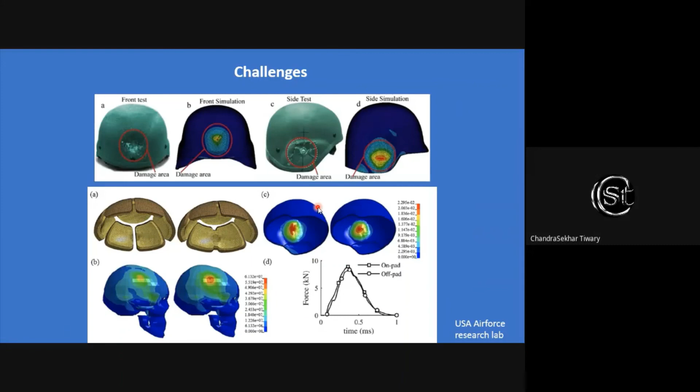Now, the question is, can we build this kind of porous material for such applications? And the answer is yes. If you take a little bit more complex structure, which is called tubulanes here, they are fairly dense so that they can stop the bullet. And these are very complex, very similar to schwarzites.

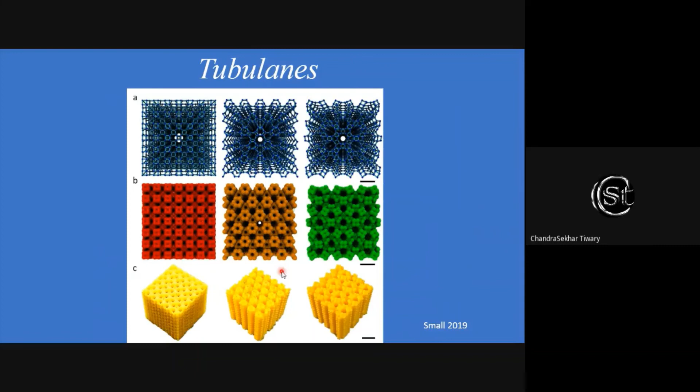They are topologically complex, and they don't have any single flat surface. They are all curved all over. And once we created the structure, we have printed it, and again it shows a lot of excitement in terms of mechanical deformation. For example, they are directional, so it means that you can control the deformation depending on the requirement. Even the fracturing takes place in a certain direction and so on. All these can be tuned in the structure.

And you see here, specific energy absorption is way higher than just a solid 3D cube, almost twice of this. And at the same time, the density is also low. So it's lightweight, and at the same time it can absorb a lot of energy. And this is the mechanical property we are talking about. You can see it can take a lot of load as compared to any other porous structure.

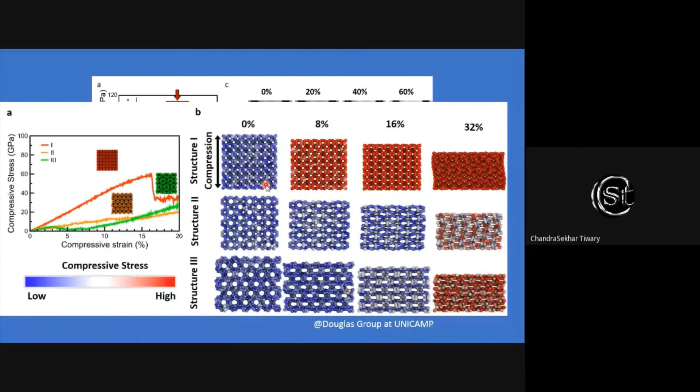And most interesting is this bullet test. So what we do is use 2 kilometer per second bullets to hit this structure. And then after the impact, we have done X-ray imaging just to understand the cracks and so on. And if you see the structure here shown by the laser pointer, if you take a solid block and you impact it, you can see a lot of cracks generated.

What it means is the bullet has transferred all the energy to the bottom, and that's the reason why you get the effect of this impact. Whereas if you make this kind of structure, you can see the bullet or energy got trapped wherever it hits. And when we do analysis of this damage, if you have a simple cube, you can see huge damage, whereas this complex structure or tubulanes show in some of the cases very less or moderate damage in the structure.

But one thing is clear, you don't see any energy transfer or any deformation in the lower part of the structure. It means if your soldier's head is in this region, it's completely protected. Now, when we do simulation, what we clearly see in MD simulation is, if you hit the structure, the bullet gets trapped because of the topology. At the same time, locally this polymer can melt, but it doesn't transfer all the heat because it's a bad conductor of heat.

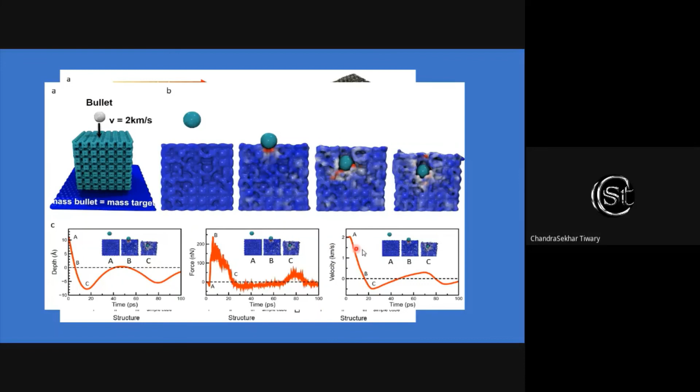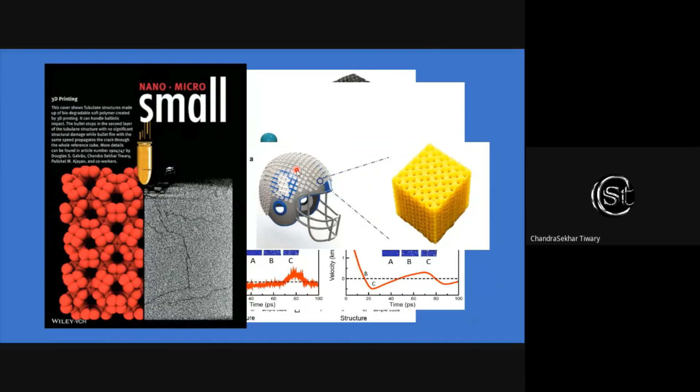It melts locally. Still, it doesn't allow the crack to propagate, and the bullet doesn't affect the lower part of the structure. And we have done a detailed study of this structure, which is shown in the figures, and the details are mentioned in the paper. And this was on the cover page already. And there are people who have started making real helmets or real protection shields out of these structures already.

Now, another area where this 3D printed structure with higher surface area can be used is the society aspect. Several people have shown 3D printed structures can be used for removal of contaminants, water purification, or even catalysis. There are several papers; people have already started exploring such applications. Now, this kind of porous structure can be damage tolerant, with fairly controlled deformation, in the automotive industry.

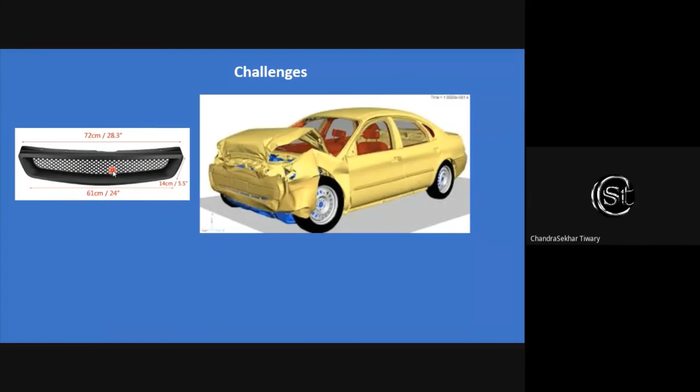If you look at the front part of your car, generally it is made of this kind of panel, right? So when the car hits a solid object or any object stronger than this particular material, they deform, and mostly they rupture, fracture or disintegrate, but they never transfer the load to the rest of the body of the car, especially the engine part attached in the front. These are made of plastic. We started looking at whether we can build a structure with controlled deformation.

And one of the works, done by Weissmüller in 2008, took gold and copper nanomaterial, mixed them and made a structure out of it, and then dissolved one of them, mostly copper. They etch out the copper, and what is left is a very complex structure. These are at atomic scale, around the 100 nanometer range. Each of these blocks is a couple of nanometers, and the TEM shows around 20 to 50 nanometers. The idea is, now we have a solid structure. Can we take this atomic scale structure and get the advantage of this topology at a higher scale?

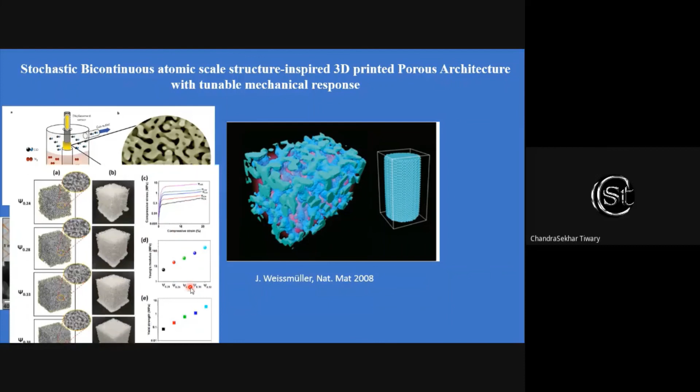And when we print different thickness, different density, we can see with the density, the modulus and the strength can be tuned. Not just that, we can fit with the model, and if some requirement comes in a particular region for a particular modulus, we can print that particular density material wherever you need. And not just that, we can increase surface area by making higher thickness of the structure. Hence we can have different load bearing capabilities, as well as different energy absorption and so on.

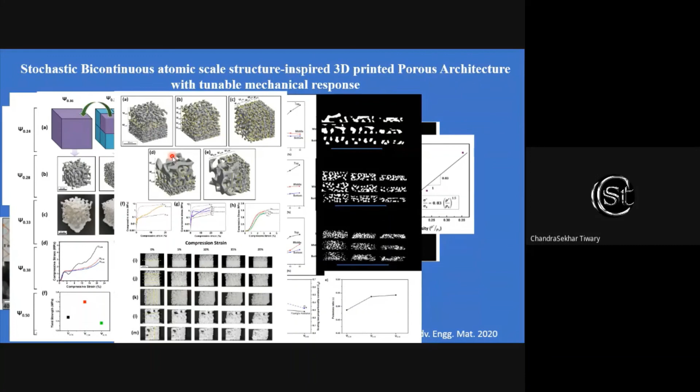Apart from that, these deformations are different in different regions, and you can see if you have a coarser structure, the load transfer is fairly high, whereas if you have a fine or more surface area structure, the load transfer is localized. Apart from that, we have built the 3D structure with different gradient. When I say different gradient, it means you can have finer, coarser, higher dense, lower dense. All these you can tune and print in a single object, and you can decide how much stress or how much load you want to take in that particular region. All these can be done with this particular structure.

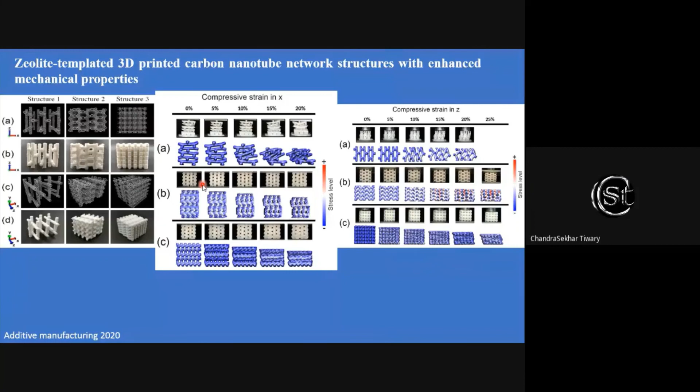And we have extended some more structures where we can pick up zeolite and try to reinforce and try to understand deformation, or try to introduce anisotropy in this kind of deformation. Suppose you want deformation in just one direction, we can build those structures. For example, zeolite is one where it's very strong in one direction, another direction is soft, and it will disintegrate.

Recently, we just published a paper where we use a mathematical based model to build the structures, which is called Menger sponge. They are porous, but they have certain periodicity. When we change the shape of this porosity or these individual holes, we can clearly engineer the mechanical properties or energy absorption. We do deformation of these structures and try to understand the role of this porosity or this topology, and try to compare with FEM and explain the whole idea.

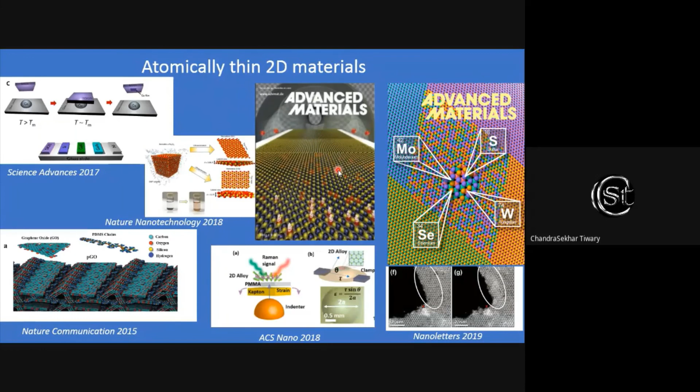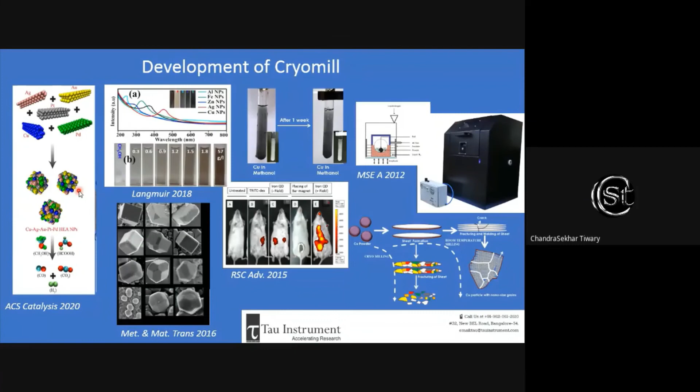Apart from this 3D printing, we work on 2D materials and new 2D materials, and try to engineer them for specific applications, and most of the details are there on the website. We work on nanoparticles and development of nanoparticles, and in some cases we make multi-component nanoparticles and try to see their utility in energy and so on. So that's another area our group works on. And some of these processes are used for environmental applications like electronic waste recycling and so on,

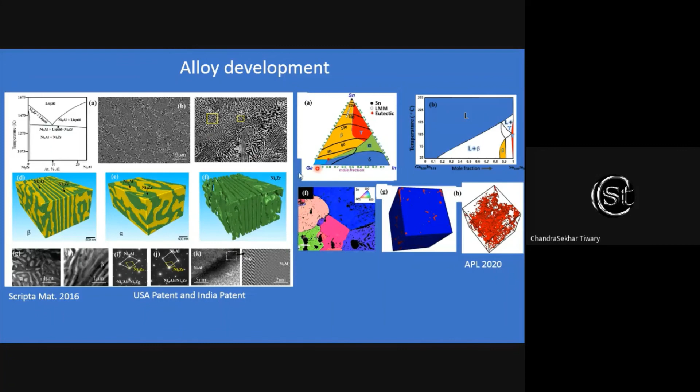which is there on the website. And a major part of the group works in alloy development, where we try to engineer microstructure to get mechanical or other functional properties as well. There are several intermetallic based materials of higher strength or higher temperature stability. We try to develop them and evaluate their structure property correlation.